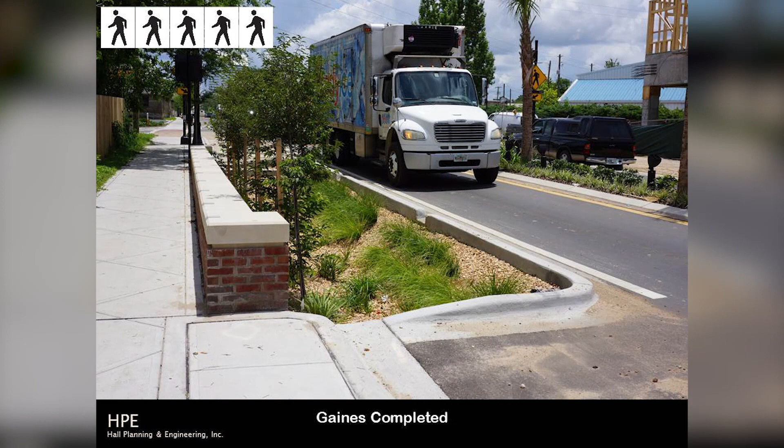Here's another view of Gaines Street, highlighting several things. Yes, the trucks can still make it through. You can get your food, you can get your FedEx package, because the streets will be sized such that the trucks will still move through. Okay, that's not a problem.

But take a look at this. This is what we call a rain garden. When the water hits the street, it washes right into that lower area where you have plants. Then it collects the water for a while and purifies the water, and it finally slowly seeps in, gets absorbed into the surrounding turf. There are six or eight of these things along the corridor. That's a very innovative element that you can do to help solve some of your drainage issues.

And there's a low wall that people could just sit on and have a conversation. So these were some of the great features that were built into Gaines Street. And then we're back to 13th Street.

This is what it looks like today. It only gets two, and it's a stretch to get those two walkable figures up there, okay, because nobody really wants to do much walking on the current 13th.

You do have some traffic signals. I have a device right here that's a radar gun, called a pocket radar gun. You push that red button and you get the speed of the car that's approaching you. So I had this with me over my first visit, and then yesterday and last night. Last night, when we were speaking with some other people about this project, I clocked some people at 45 miles an hour in one of those lanes that's out there on 13th.

Now, this is an important diagram. If you are unfortunate enough to be hit by a moving car, you're in a crosswalk or they're making a turn and they hit you: if that vehicle is going 20 miles an hour, there's only about a 5% chance that you will be a fatality. But if you get it up to 30 miles an hour, it goes over 50%, your chance that you will die from that crash. And if it's at 40, forget it, it's over 80% that you will not survive that crash.

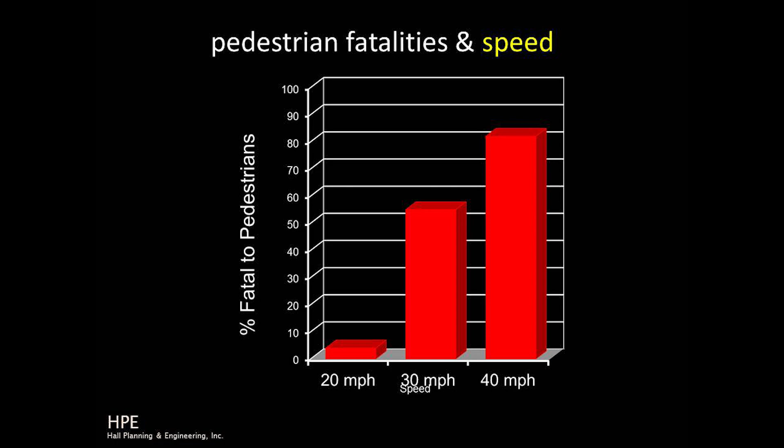And remember what I clocked last night, 45. That 45 person, if they step out in front of a car going that fast, they're toast. So this is very important to our understanding of why we need to manage the speeds well. And there's clear evidence that the safety of the pedestrians, which is a paramount interest to everybody, they're protected.

Now, there are walkability factors we use in the planning of these kind of streets to get the elements right, all the pieces. This is a David Letterman countdown backwards: 10 is street trees. They're important to you, they provide shade to your walking and your parked car. There are traffic volumes, you want those to be a little lower than usual. Sidewalks, not even in the top 5, okay? Narrow streets are good, they help manage the speeds of the motor vehicles.

Interconnected streets: you need a web of streets for you to take as a pedestrian for that last part of your trip. So a whole network, and your grid that is downtown and along this stretch of 13th is very, very strong in this particular category. You have a good interconnected set of streets.

On-street parking, very important, very important. It not only does it help slow down the vehicles that are passing by. I mean, nobody's going to drive 60 miles an hour past a row of parked cars, right, if there's only one lane.

On-street parking produces pedestrians. You park once and the two people get out and may go to two different places, one to the post office, one to the cafe, then meet at the concert after and get back in the car. So parking is important for people who don't live in the immediate community to get in and use the mix of uses, and it's a healthy way for people to get around without driving from place to place to place.

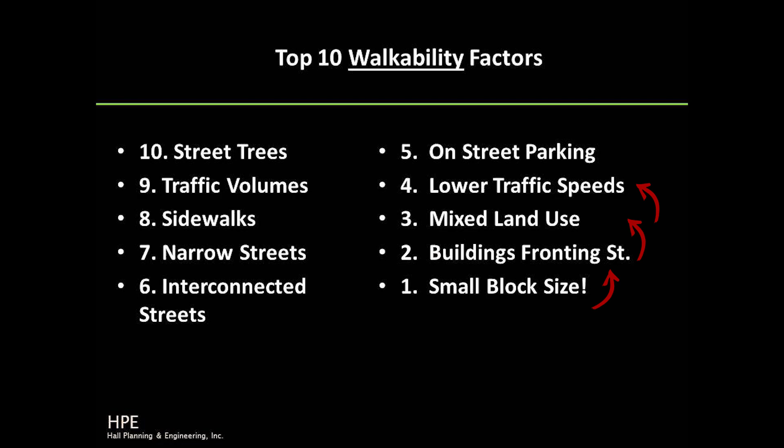Number one is small block size. It's not too exciting, but small block size gets your buildings to the front because they can't wander to the back of the lot. It gets you mix of uses because you have a lot of different blocks that different kinds of buildings can occupy. And it lowers traffic speeds because you have more intersections per mile. So it helps with a lot of things. Small block size is one of the really positive things about Columbus downtown and Columbus along 13th.

So a key solution is, as a community, to have your good planning staff map these urban and suburban places. Once you define where they are, you can see that's suburban, that's urban, and color the maps to get your entire city analyzed for what the character and context is. Then you design your transportation facilities to match that.

So the key thing is know where you are, and then design your streets and sidewalks and everything else according to those patterns that you see.

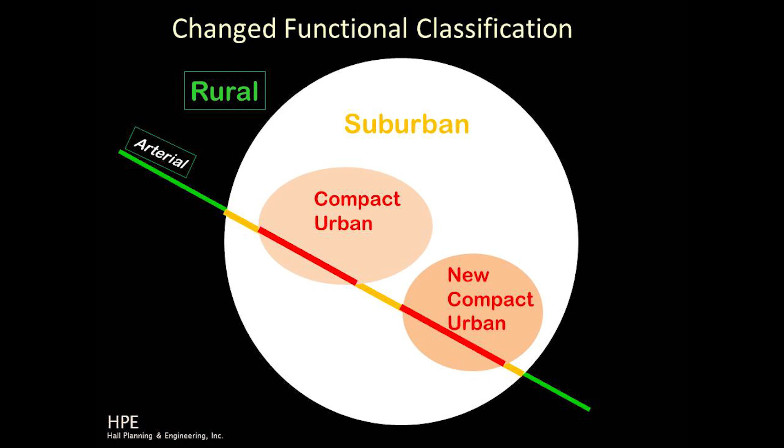You can also have a new compact urban. Take Farmer John's Field, take the Ace Battery Factory—that's a brownfield. Any time you get an area that's scraped clean and you get to start fresh, you can say we want this to be a compact place where people can walk around. You can designate that from your comprehensive plan and your other activities with the city.

I will say the Georgia DOT has been extremely cooperative on this entire project. It's their road, their jurisdiction, but they've been very positive about the potential of changing this from a drive-only place back to a walkable place like it used to be.

Their current procedures today don't allow you to do 25 miles per hour on an arterial that belongs to GDOT. But we've been successful in some other places getting the speed limit posted down to 25. You may end up with 30, which would be an improvement on those red bars, but we'll see how that works out in the future.

Now the functional classification is rural, suburban, and compact urban. You see the small block size in the compact urban, and the large block size in the suburban and rural. That's a key difference in the transportation networks that get planned in these three different context areas.

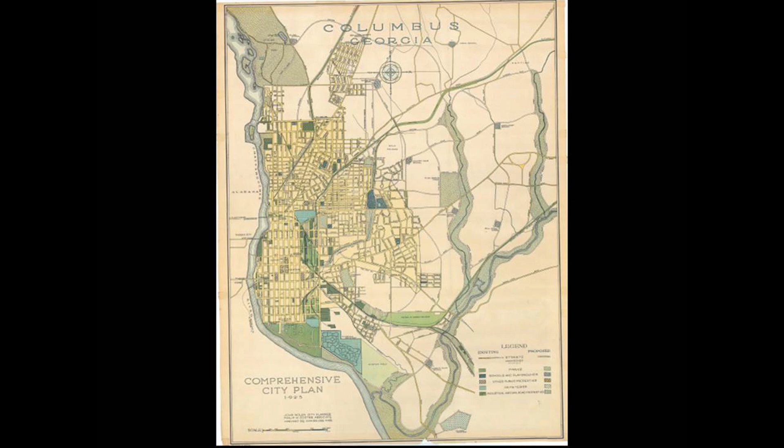Then the Depression came, and most of these guys were out of business. By the time the Depression was over, they had either died or retired. So a whole craft of how to put cities together just evaporated. Just evaporated, and we forgot about how to do it right. Now we're learning how to do it right again. It's a good time to be in the profession.

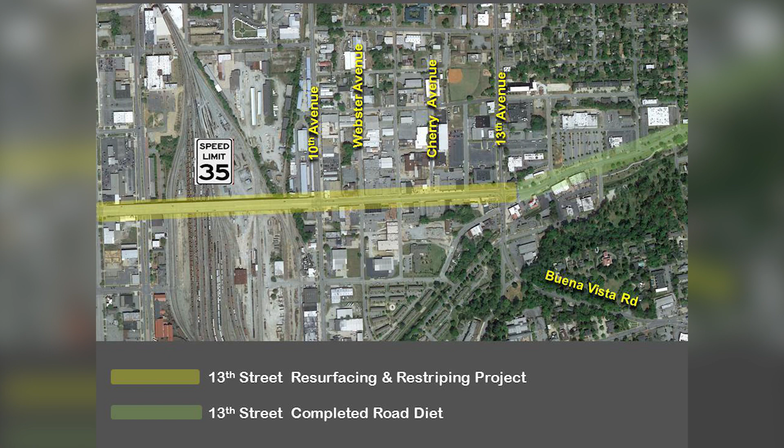Existing, the urban design and the transportation design were done separately for your current version of 13th Street. The engineers that decided to scrape the parking off and give you extra travel lanes were not thinking about any of the businesses along each side of the road, and the degree to which it would plunge those businesses into a lower economic status.

This is before we got this place-based design and planning worked out like we have it today. The pedestrian scale was ignored. They didn't know really whether they were suburban or urban. They didn't really understand it, so it didn't turn out very well. The local economy was not considered important when that street was made a 4-lane highway in such an important part of the city. That's one of the key components.

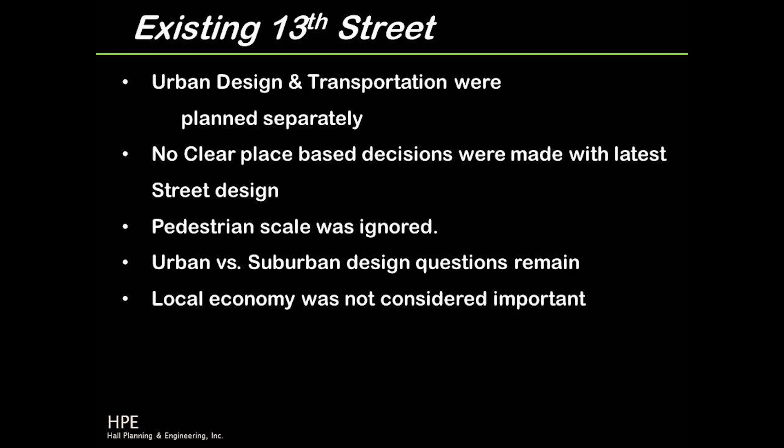When you're considering the future of 13th, you really need to debate this context. Is it urban? Is it suburban? Is it rural? Where are we on that context? That's where the debate needs to be. Once that is decided and the policy is set forth, the transportation is just a matter of knocking out the design for one mode of transportation or the other. So the question is to walk or not to walk. That is the question.

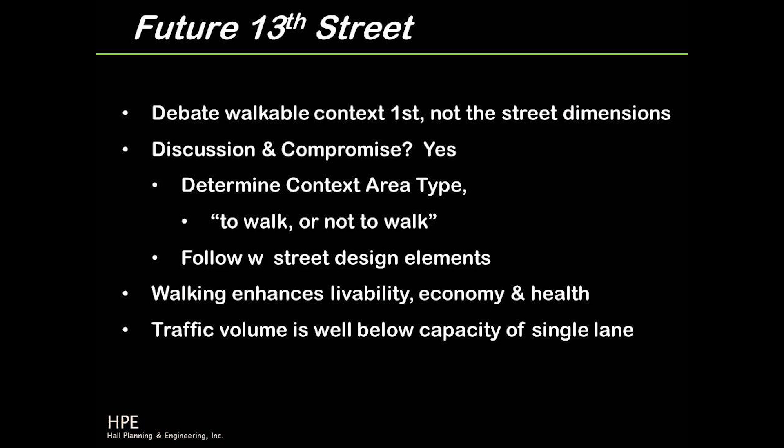Now let's talk about traffic for a minute. You all remember that last spring there was a test in May of all the ugly orange cones out there in the middle of the street, and people said, what in the world is this? It was there for quite a while, so some people got used to it.

These are the traffic measurements made during the period of the study, midnight to midnight on the traffic scale. When people wake up, they get out and start moving around, that's 9 o'clock in the morning when that peak goes up, and it stays up considerably well through the day. So it's well used in those middle hours of the day. Some streets you count go way down and have a valley in the middle of the day where the street is unutilized, that's very inefficient. But that happens on some of the commuter routes.

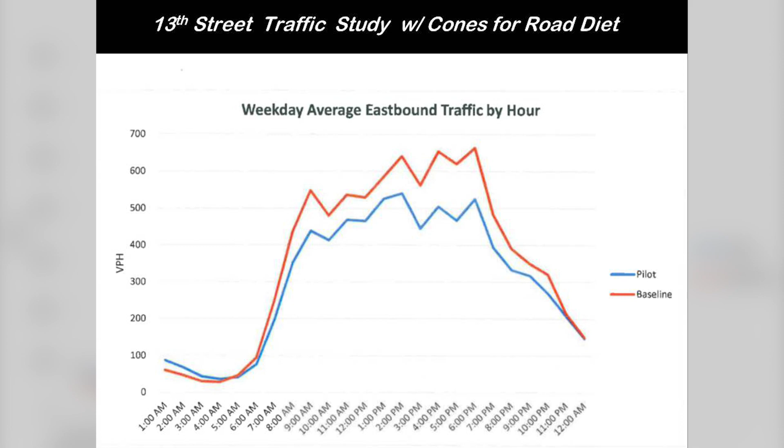But this street stays up all day, and the most important number on this entire chart is this one: 700. None of your background counts taken before the test, or the counts taken during the test shown by the blue line, were greater than 700 vehicles per hour. 700 vehicles per hour.

And the reason that's important is, how do you measure corridor capacity? There's no such thing as daily capacity, because you could still get out there and drive at 2 in the morning. So you have to measure capacity on an hourly basis, the maximum hourly flow possible through the intersection, not the mid-block, but the intersection. It's like an hourglass, where the intersection is the narrowest part of the capacity measurement.

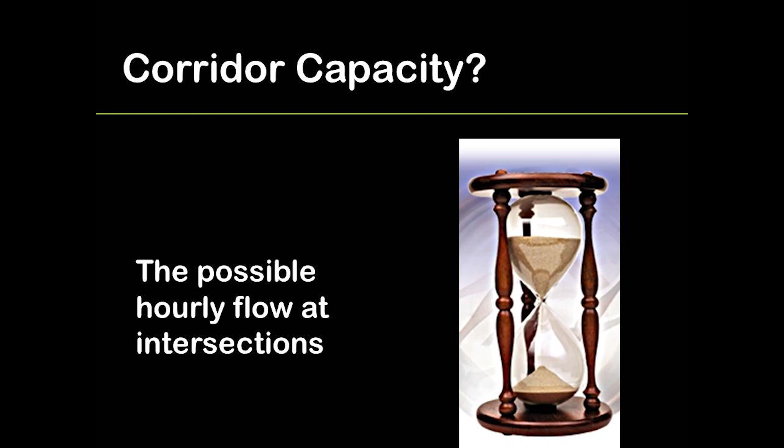All right, a little math here. Engineers have measured traffic for years, and we've discovered that if you have plenty of demand behind you, cars go by at about every 2 seconds, whether you're going fast on an interstate or slower in the city. 1,000, 2, 1,000... that's about the pace cars go by. Test that yourself sometime in a busy situation. 2 seconds per car, regardless of speed, because at higher speed you separate further from the car in front of you. At least that's what you were told in your driver training book, right? This applies everywhere except Atlanta, where there are a lot of NASCAR fans who want to draft behind you at 70 or 80 miles an hour, 6 feet off your bumper. But most of the time, it's 2 seconds per car.

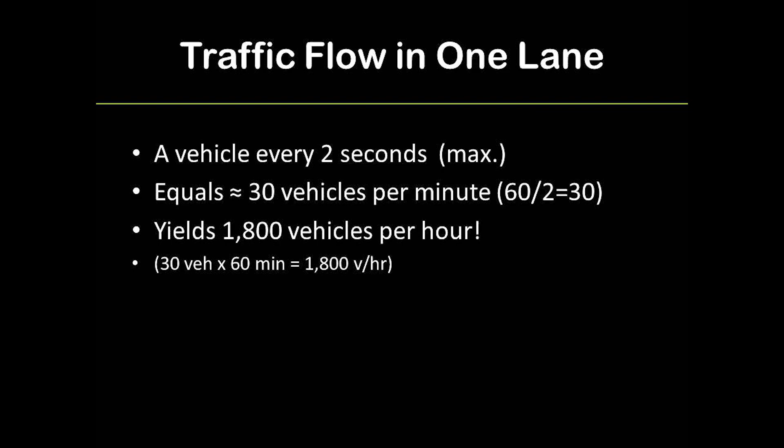That equates to 30 vehicles every minute, 60 divided by 2. By hour, that's 1,800 vehicles per hour that can fit down a single lane in an urban setting, if the signal doesn't turn red - that's 100% green time. When you get to the signal, which is the crucial part of capacity, if it's green all the time, completely unrealistic, you get that 1,800. But if it's half the time, you get 900. And if you get 2/3 of the green time - I haven't checked the timing yet on 13th, but I think it's probably between 50 and 60% - you get between 900 and 1,200 vehicles per hour that can fit down that lane with the signals operating.

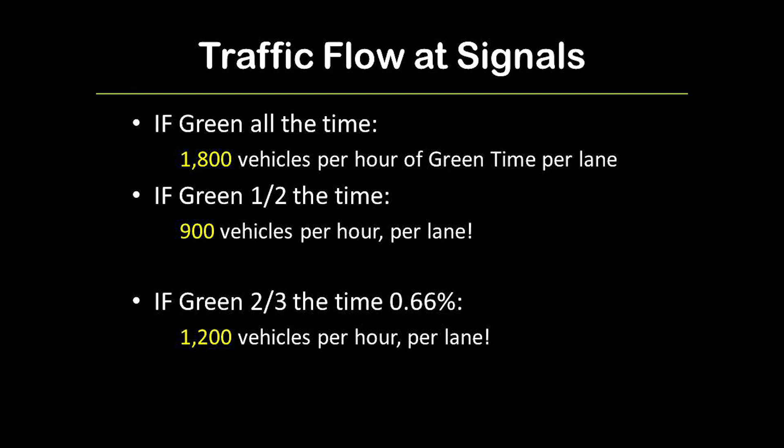Now, what was your highest measured hourly volume last spring? 700. You're with me, 700. You have a headroom of 700 up to 1,000. You have 300 cars per hour of likely room for growth, and so the 2 lanes, one in each direction, can handle all of that volume throughout the entire day. So that's the traffic result of the analysis from last spring.

So we're comfortable with it. GDOT is comfortable with it. We've had conversations with them. They participated in the traffic counts and the study. So back to the existing condition - you've got the 4 lanes, with 2 lanes in each direction.

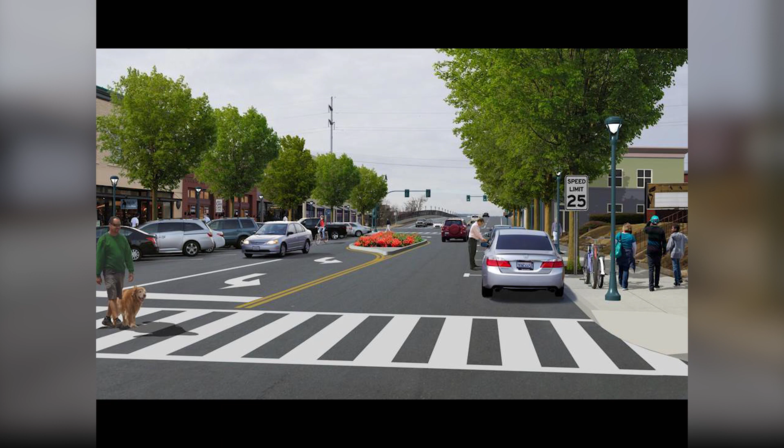And then as it matures, this is the kind of appearance you could have on 13th, with the trees maturing, a new mast arm down here that replaces the swinging lights there. There could be a median here with flowers. If the final design comes out that way, and you want it, it could be done.

Let me show you that's an enhanced view of the viaduct that goes over the railroad track. Notice that the pedestrian scale lighting is there, like you have in other places around town.

And this car is now in a right turn lane, they're going to turn right and go down 10th. The outside lane is striped off, so you'd have a 4-lane viaduct instead of a 6-lane viaduct. That'll control speeds coming across there and it'll blend better going 4 into 2 instead of 6 into 2. You don't want that.

So the outside lanes are effective turn lanes coming east. Notice there are 2 lanes here, 1 there and 1 there. The 3rd lane that exists on the viaduct today is striped off and not available for automobile use.

Now, after you get all of this accomplished, you can decide as a community what you want to do with that extra 12 feet of space, whether it's bicycle or trail or planting trees in urns along the road. I'd like to see a watch opportunity for watching the railroad activity—take your kid that loves Thomas the Tank Engine out there and let him watch the trains operate a couple times a year.

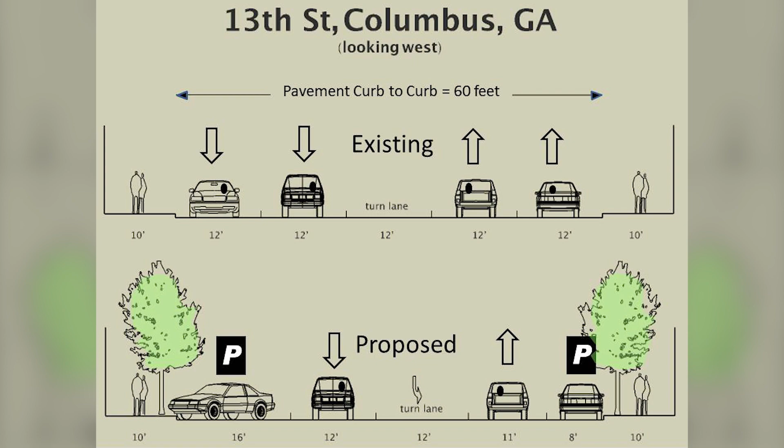This requires 16, 12, 12, 11, and 8. So we've done this before many times. We know that will work in this particular setting.

Okay, why are we doing this? Well, GDOT has a resurfacing project. They're putting money into this project, and it's of no cost to the city. So that's a major way to help move the redevelopment around that spiral a little bit with GDOT help.

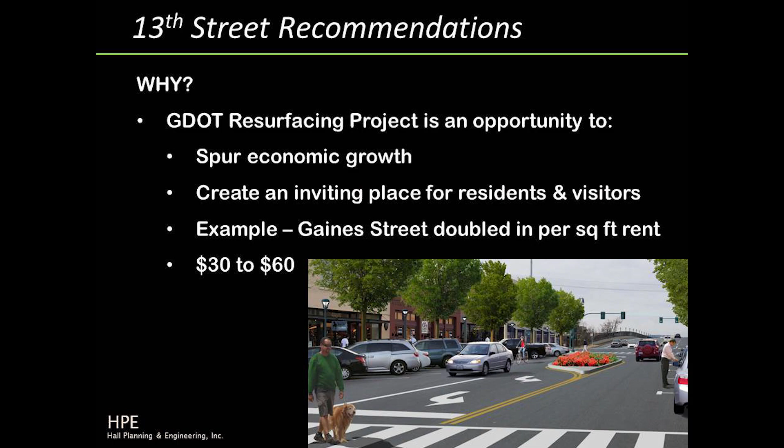Okay, so it spurs economic growth. The place is better. Now, Gaines Street—the data are that they had about $30 a square foot for leasable property on Gaines Street when they started, before the street was finished. Afterwards, it grew to $60 a square foot as kind of an average asking price for retail places along Gaines Street. So it doubled. That's proven economic benefit from doing the lane reduction and the redevelopment of Gaines Street.

So what are we doing? Once again, we're converting the outside lanes to parking. You can put the angled parking on the south or the north, wherever the redevelopment has a higher demand for parking, and it can switch—it could go from the north to the south as you move down this section of 13th.

And we're pushing for the 25 mile per hour posted speed. Then in another phase after GDOT finishes the first phase, you can go back and do median treatment. You can put in larger trees at that time, and narrow the pavement, which will help manage the speeds.

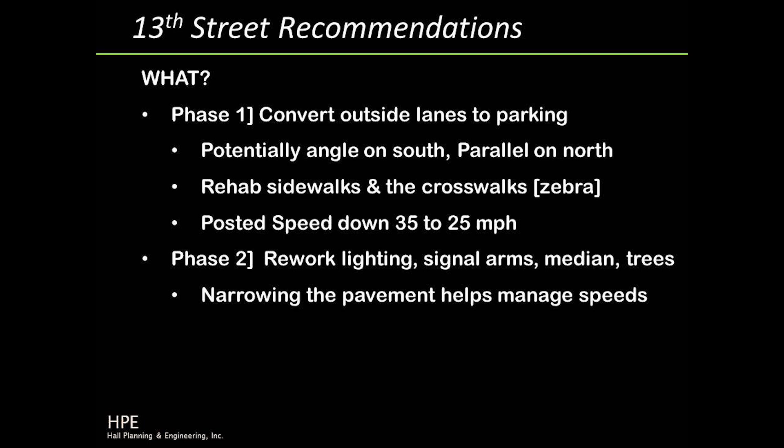That's the presentation. That is the goal for the project, to end up with something that looks pretty much like this. So I'd be glad to take any questions on any of these slides. Yes, sir. Yes, ma'am.

Do you know what the average rental cost is at the moment per square foot on 13th Street? It's below 30. It's below 30.

Business people? 5 to 7—you're approaching the carpet and tile people. All right, carpet and tile businesses. You go to where they are—they're in some of the most unfortunate business segments of your street network. So yeah, it's less than 30, where Gaines started.

Yes, sir. What were the vehicles per hour on Gaines Street?

Very similar. Gaines Street had 20,000 vehicles a day, and 13th has 20,000 vehicles per day. So the cars were moving through in the same kind of volumes and the same kind of peak hour volumes. And Gaines, again, was not a commuter route. It had a lot of activity, so it went up and stayed pretty active all day long. That's the way you get 20,000 vehicles through on a 2-lane street for the entire day. If you just had an AM peak and a PM peak, it would be more like 16,000, 15,000.